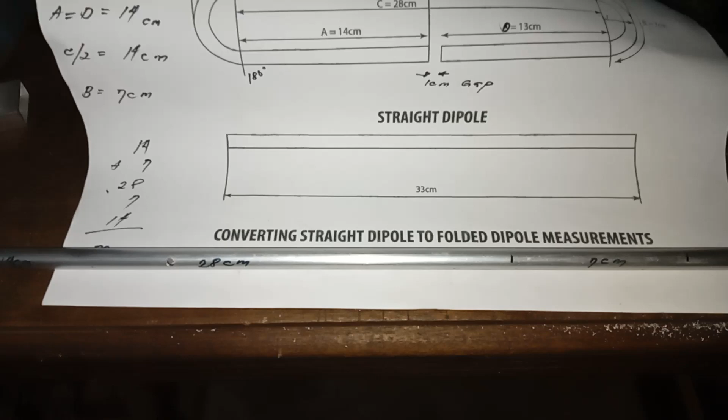This is a technique for converting a straight dipole to a folded dipole measurements. What we have here in this example is a UHF antenna with a center frequency of around 435 megahertz and a bandwidth of around 10 megahertz, from 430 to 440 megahertz.

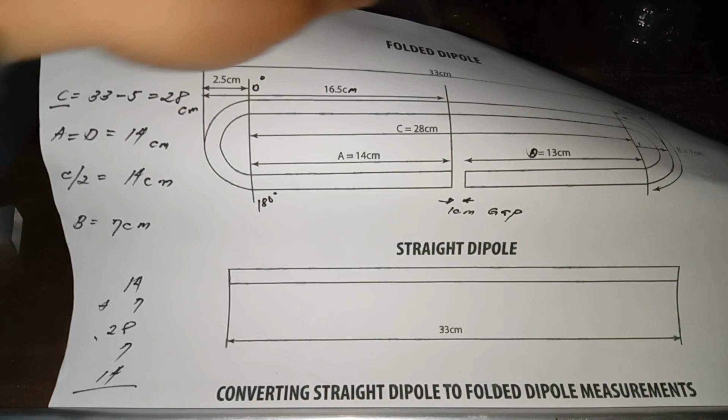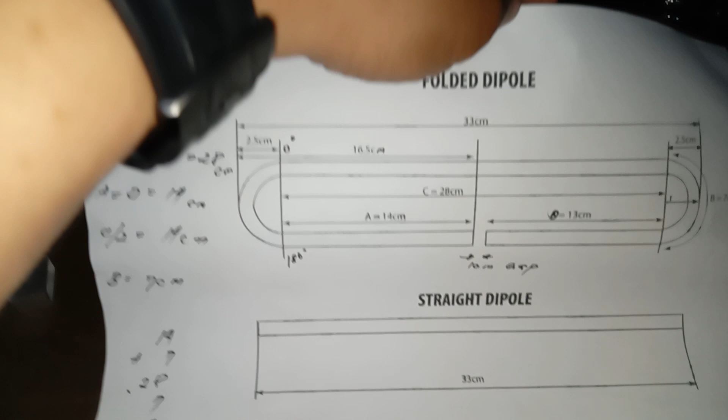We require twice the material of the straight dipole to produce a folded dipole driven element. So we need to consolidate all those extra materials properly to produce the required folded dipole without wasting too much aluminum.

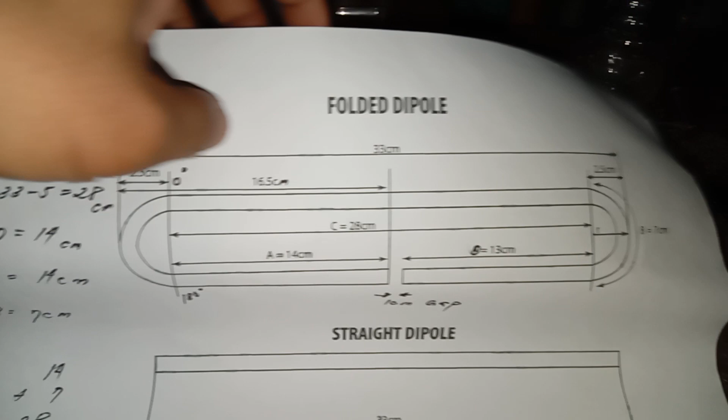So from here, we have 2.5 centimeter from each side. That is the bending radius of the bender, which will produce an additional 7 centimeter designated as variable B.

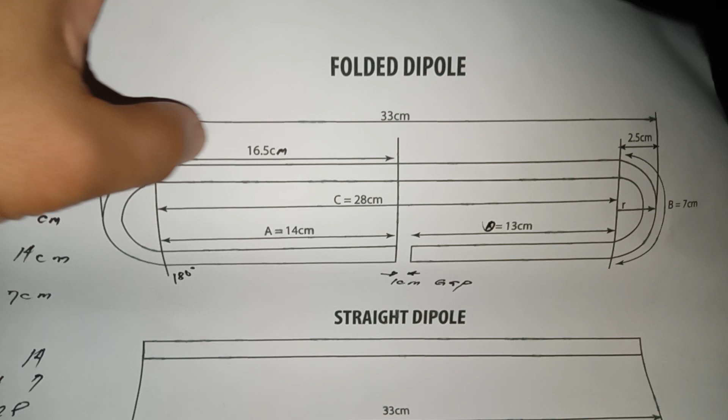From this measurement, our side C is the longest side, which is actually the resulting measurement from subtracting the combination of the bending radius, which is equal to side C, 28 centimeter. So 33 minus 5 is 28 centimeter.

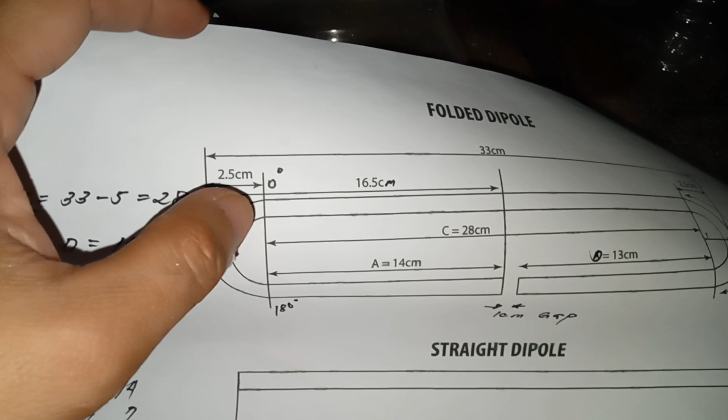The 2.5 centimeter is the starting point, or the bending point, from 0 degrees to 180 degrees, resulting from bending the folded dipole elements.

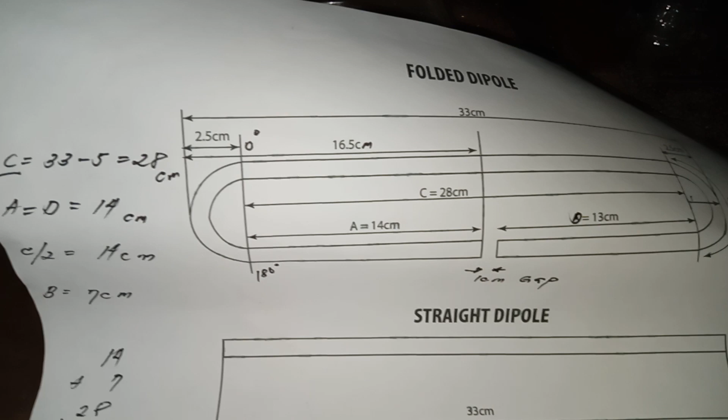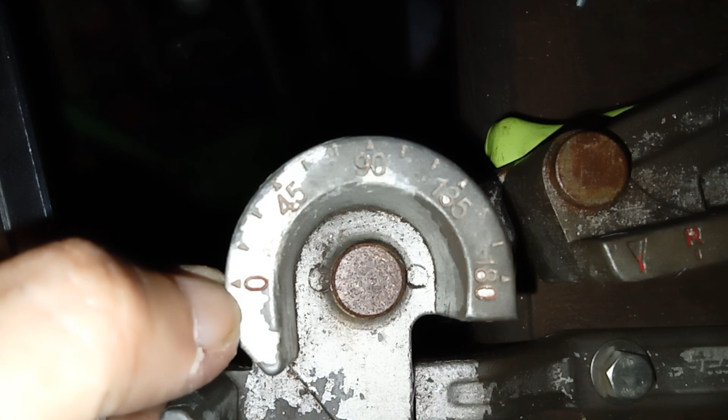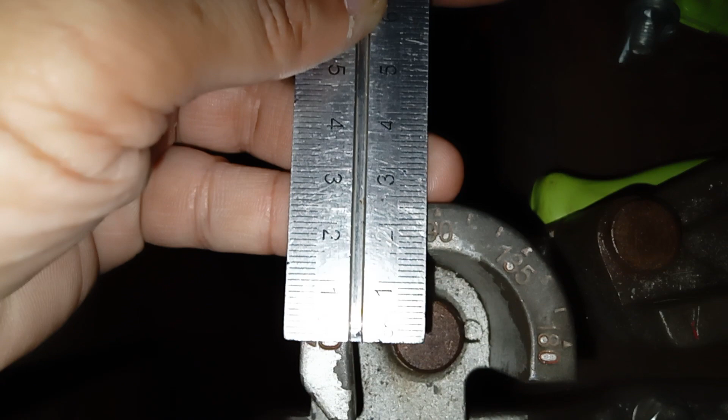So to show you, if I measure the starting point 0 to 90 degrees, as we can see here, it's 2.5 centimeter from 0 to 90 degrees. That 0 to 180 degrees will produce exactly 7 centimeter of additional aluminum material, designated as B from our diagram.

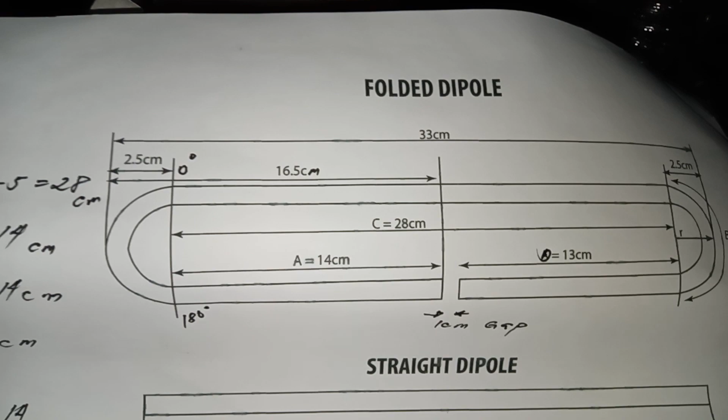So we need to combine those extra materials and consolidate all the length of the materials to produce the actual length of the aluminum material that is required to produce the folded dipole.

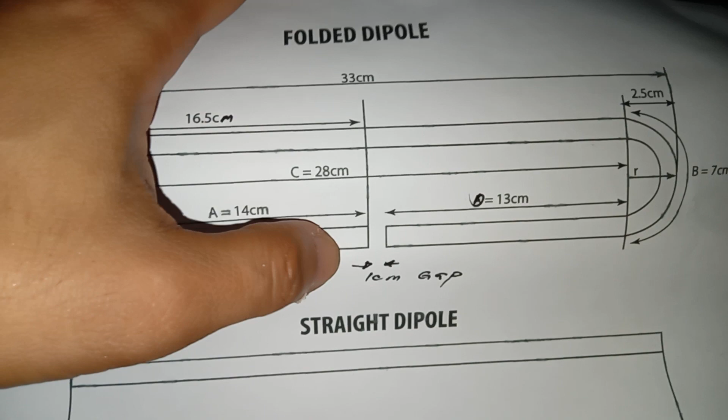So from this measurement, we have our side C 28 centimeter, side A and D is 14 centimeter, but here we designated it as 13 centimeter only because we subtracted 1 centimeter gap, which is required for us to feed the folded dipole, or we need to insert the feed line from these points with a gap of 1 centimeter.

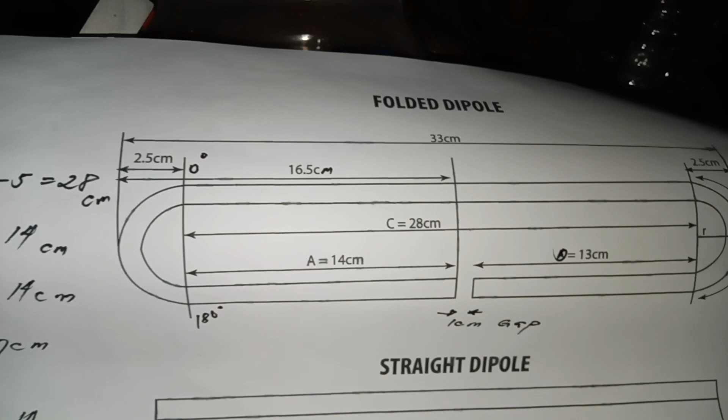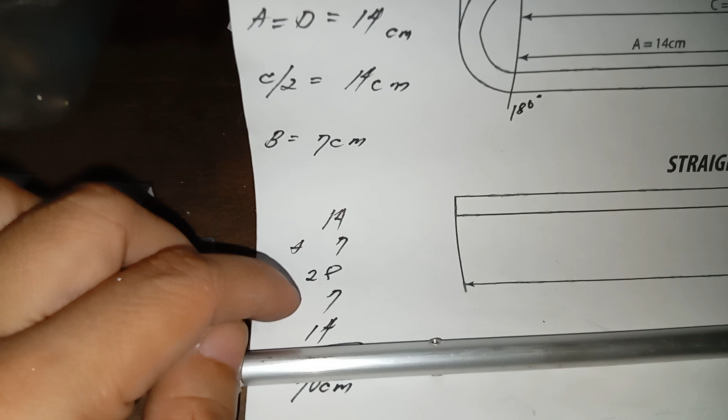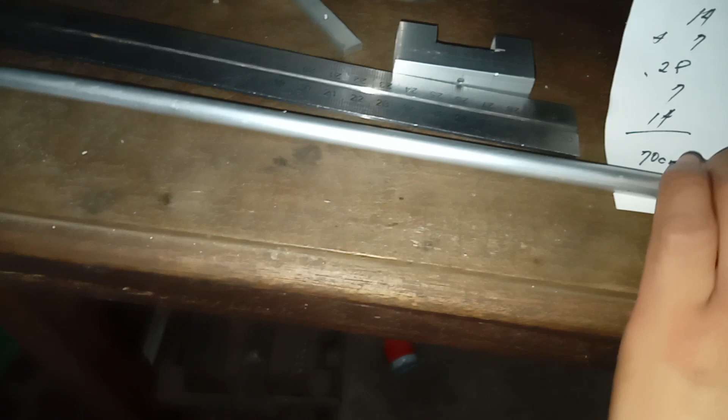So consolidating all the material measurement, we have 14 centimeter plus 14 centimeter plus 7 plus 7 plus 28. So that is equal to 14 plus 7 plus 28 plus 7 plus 14, with an actual length of 70 centimeter aluminum length. So I have here an aluminum example which I already measured.

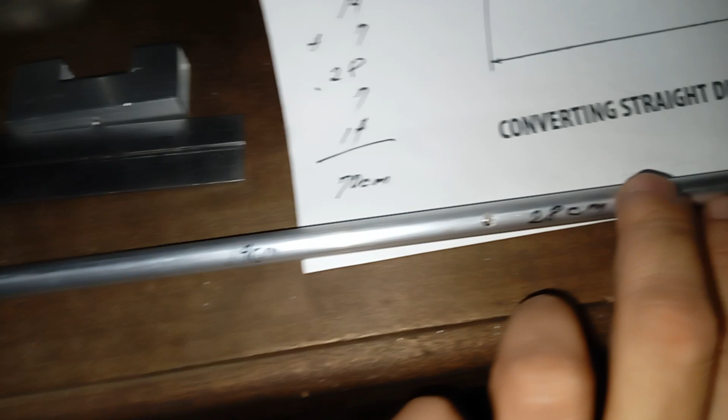14 plus 7 plus 28 plus 7 plus 14, with a total of 70 centimeter length.

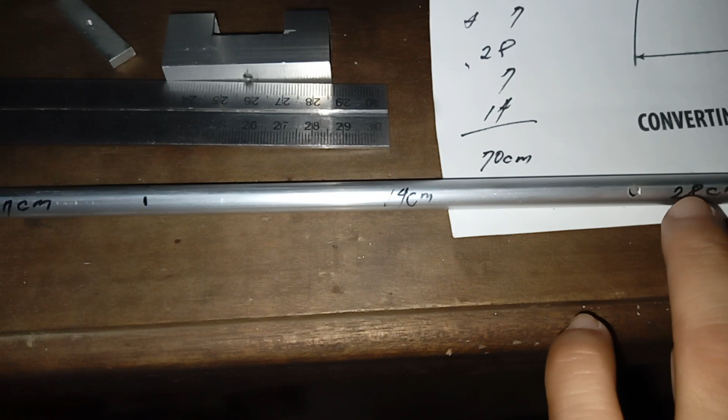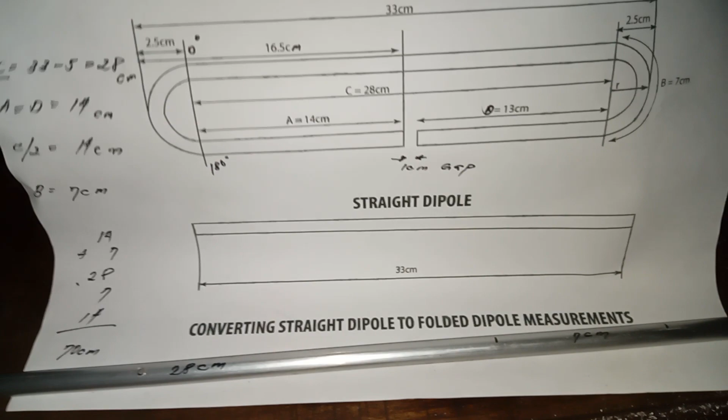This 14 centimeter is the center of the folded dipole, which is equal to the length of the longest side divided by 2, which is actually C, the designated center. So that's it. That is how you consolidate the length of the required material to produce the folded dipole driven element.